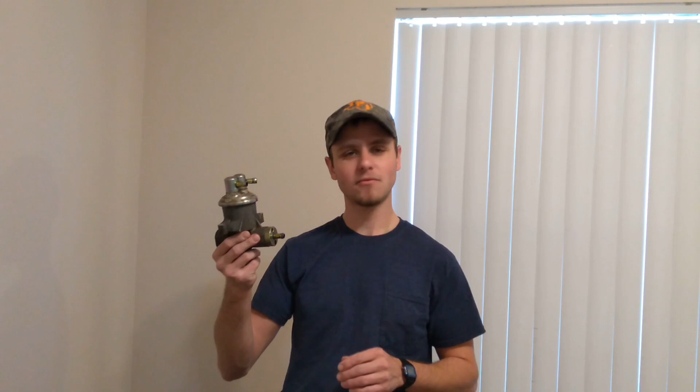Today we're going to examine the fuel pump from an old body style 7.3 Powerstroke, and we're going to figure out at what point you need to upgrade this thing in the event that you're shooting for larger injectors for higher performance. Now this applies for Ford F-250s and 350s in particular from years 1994 to 1997.

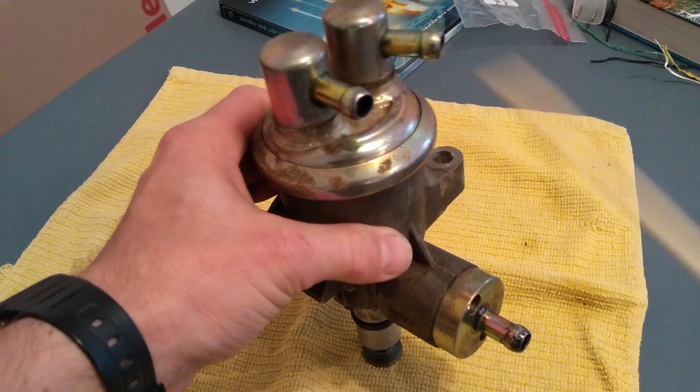Stay tuned. Now these fuel pumps feature a two-stage design. You have a low pressure stage and a relatively high pressure stage. Now the way these work is that you have a low pressure diaphragm operated stage that actually sucks and pulls in fuel from the fuel tank.

Now then, from the low pressure stage, that fuel is discharged into the fuel bowl where the filter is housed, and then from there, the fuel goes through the filter housing to the entrance to the high pressure stage, where it then exits out back at a relatively higher pressure, about 45 to 60 psi, where it goes through the banjo bolt and ultimately out to the fuel rails.

Now, in examining this pump, assuming that the pump itself is a limiting factor in the flow rate, then we're going to examine the two possible restrictions on this pump. Now, the first one is the diaphragm stage, and the second one is the higher pressure piston operated stage.

Now, the thinking here is that if we can't keep up with the flow rate of our injectors with the diaphragm stage, then we know that's the limiting factor. However, if this supplies more fuel than our piston operated stage, then we would know that our piston operated stage is then going to be the limiting factor in the flow rate of fuel to our injectors.

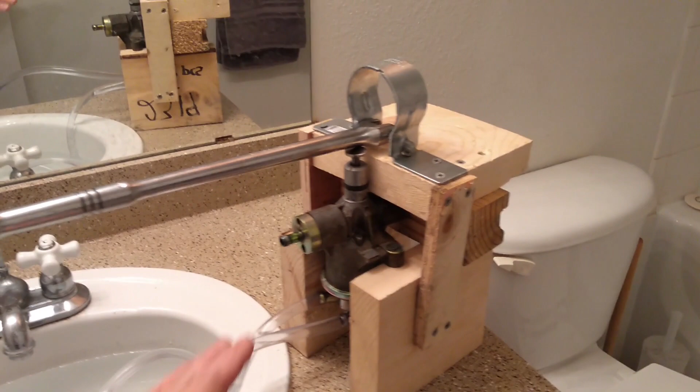Now, in order to determine what the flow rate coming out of the diaphragm stage of the pump is, I've built this kind of a goofy contraption that you see here. You can knock it all you want in the comment box, but it works. So, yeah.

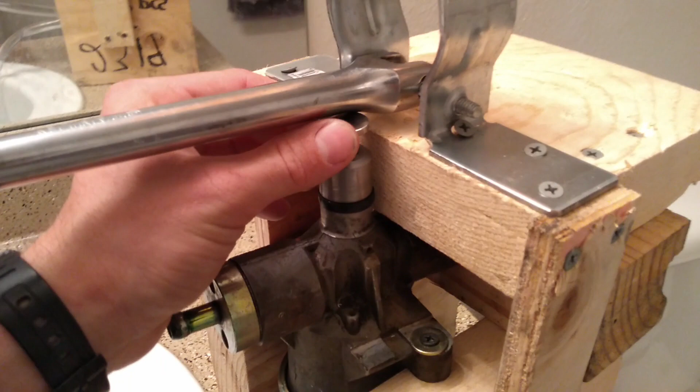Now, one of the things I found out as I was looking at the pump is that the tappet here that rests on the camshaft takes a tremendous amount of force in order to push it down and actually actuate the pump. So as a result, I've had to build this little lever mechanism so that I could help actuate a little bit better because I'm not as strong as a camshaft in a 7.3 is, unfortunately.

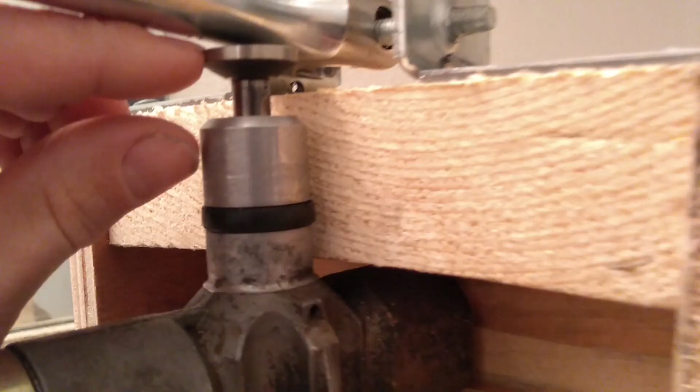Now the thinking here with this setup is that the water here is going to mimic the diesel fuel as it would normally be inside of your fuel system. Now using this setup, I can actually measure how much water or fuel is going to be pumped per every revolution that the engine turns over. And so we can determine what the volumetric flow rate is coming out of the diaphragm stage of the pump, and determine whether that's a limiting factor in our fuel supply or not.

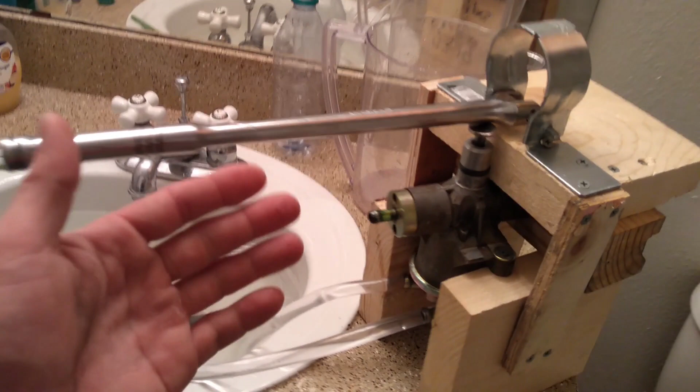Now, the thinking here is that by doing this over the course of 100 cycles, we should have a lot of very consistent pumps, and that should allow us to get rid of or minimize the amount of error that we have from initially starting up and putting the water into the tank versus taking the tube out and having some of that water maybe drip back into the tank as well.

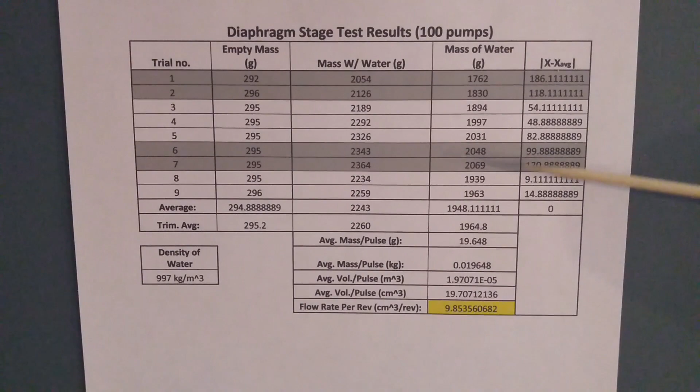Now, as a result of the diaphragm stage testing, this is the data that I collected. Now, the thing to bear in mind here, though, is that this pump is driven off of the camshaft. Now, the camshaft is actually connected to the crankshaft by way of a 1:2 gear ratio. So in other words, the camshaft rotates half of a revolution for every one crankshaft rotation.

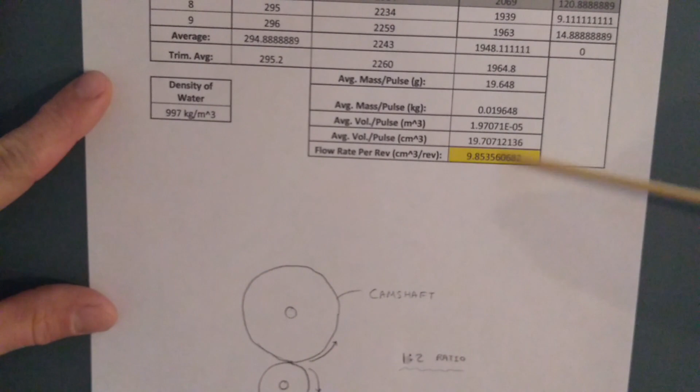Now, this is what's necessary in order for engines to operate, and what this implies is that our fuel pump is only actuated every 2 cycles of the engine, and that kind of limits us as well. So as a result, what I ended up doing was dividing the number of pulses that we had by the gear ratio, and that allowed me to translate the volume per pulse in the pump into a volume that it pumps per every revolution. And we see we get about 9.85 cubic centimeters per revolution.

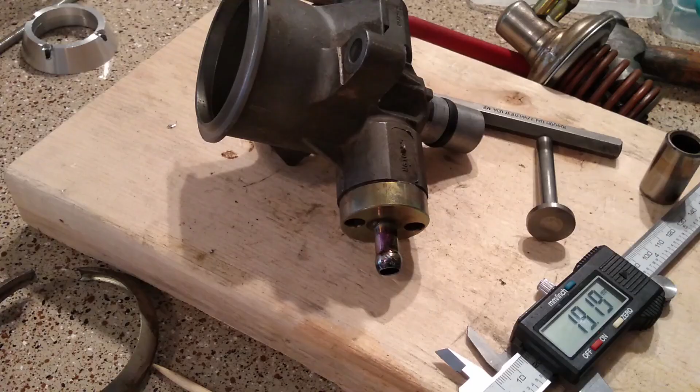Now this is great and all, but it really only matters if we compare it to the piston operated stage. So let's take a look at that next. Now, in order to determine the amount of fuel that is pumped for every pulse of the piston stage, again, I had to go about this in a little bit of an indirect manner. Now, the way I determined the amount of volume pumped was by actually measuring the dimensions for the piston inside of the fuel pump itself.

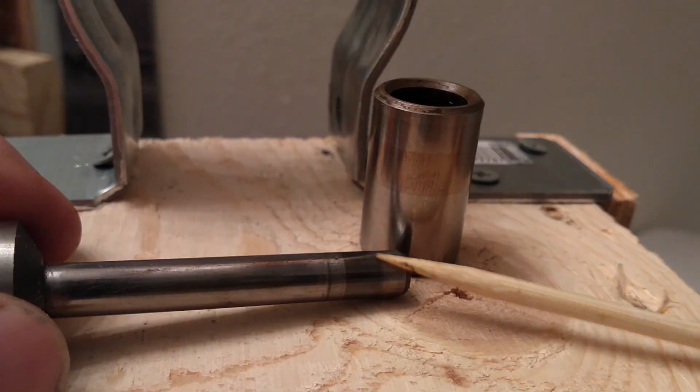Now, one thing to note here is that the way that I measured the stroke of this piston here is actually by looking at and examining the discoloration on these metal parts as they came in contact with rubber seals. They kind of had a little bit of a brownish color, and I came to reason that that was a result of it rubbing against that rubber, and with all the heat cycles, it caused that discoloration to occur.

Now, in the end, I was able to determine that for every time that this pump is actuated, this piston stage is able to move about 1.4153 cubic centimeters per every pulse that it's actuated. Now, in order to move that over to a volumetric flow rate per revolution of the engine, we got to again bear in mind that this pump is connected to the camshaft, so we have to divide that number by 2 because the camshaft spins at only half the speed as the crankshaft.

So as a result, we're able to convert this all over to 0.70765 cubic centimeters per revolution. Now, this is way smaller than the diaphragm stage, which, if you recall, was about 9.85 cubic centimeters per revolution. So we can clearly see here that the piston stage is indeed the limiting factor in our pump.

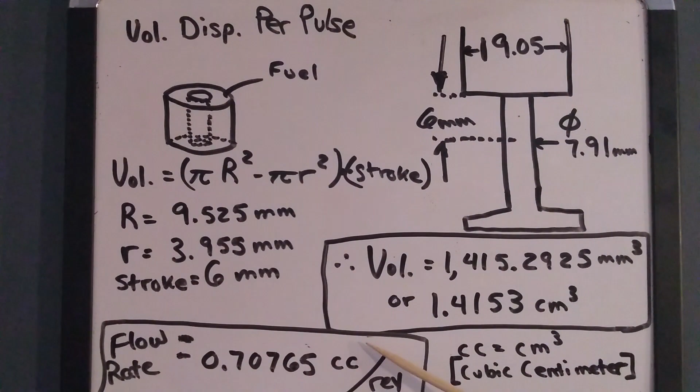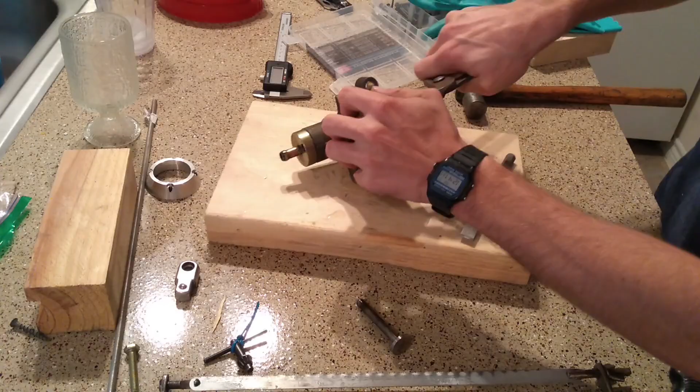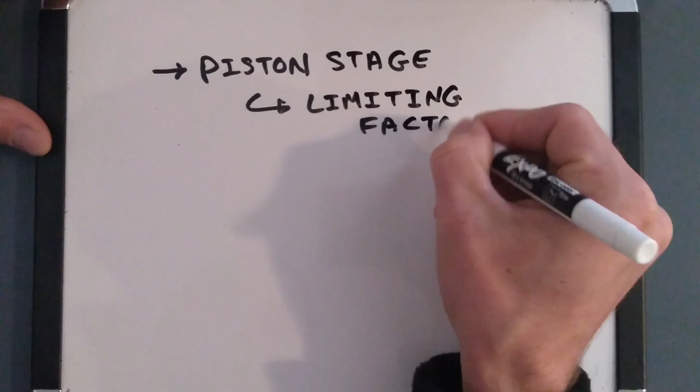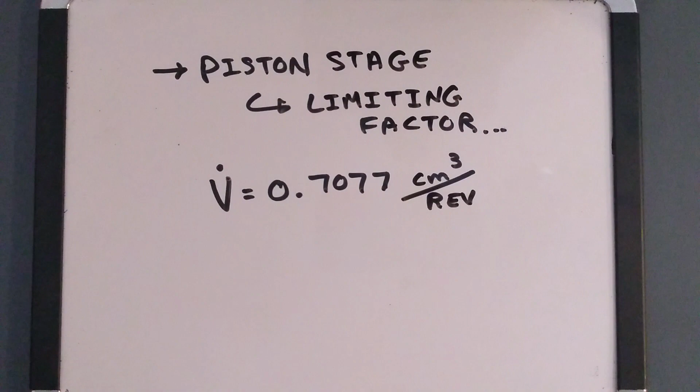So at this point, we've established that the piston stage of the fuel pump is a limiting factor in our fuel supply. And we've calculated that it can supply 0.7077 cubic centimeters for every revolution that the engine spins over. Now, in order to truly answer the question as to how adequate our fuel pump is, we need to figure out how much fuel do our injectors require to begin with.

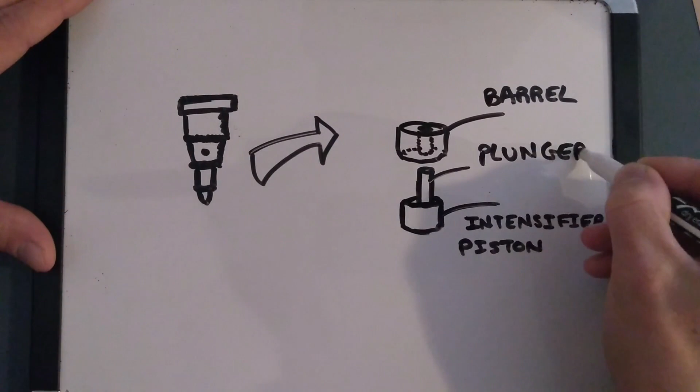Now, if we take a look at the inside of a fuel injector, we'll notice a few interesting parts. Specifically, let's take a look at the plunger and barrel and intensifier piston. Now, these are the parts that are most commonly modified to make higher performance injectors, but this has a big implication on the amount of fuel that's demanded by the injectors. Let's take a closer look.

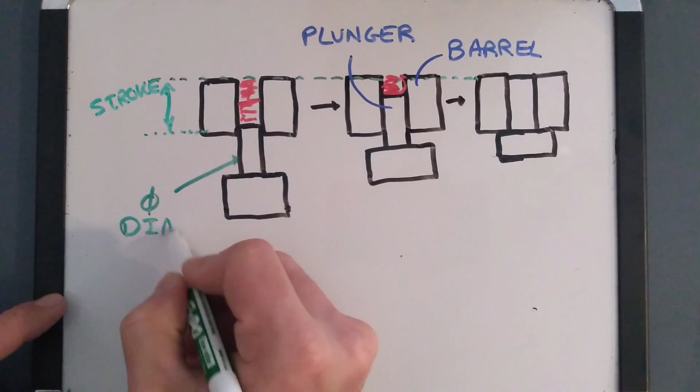Now, inside the fuel injector is the plunger and barrel assembly. These are the components that actually do the work of putting tremendous force on the diesel fuel to inject it to extremely high pressures into the combustion chamber. You can kind of think about the injector as being almost like a miniature engine with only one piston in it. But just like your engine, we need to fill it with some sort of fluid, in this case, diesel fuel. So you can visualize that there's this cylinder of diesel fuel that's present inside every single injector.

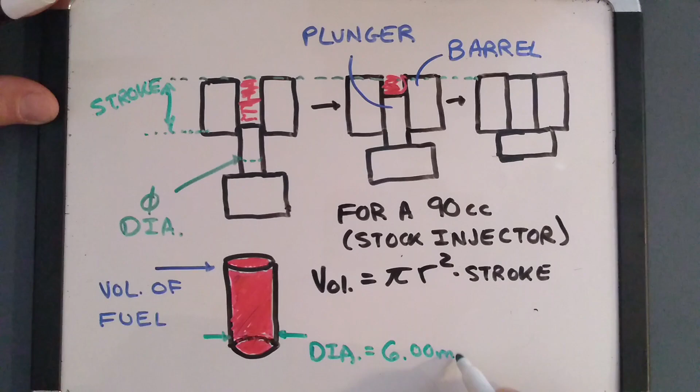We effectively need to make sure that we can fill this up in the event that we're maxing out the injector flow rate and we're dumping all the fuel out of it as we can. Now, for a stock 90cc injector, at least stock for old body style trucks, non-California models, we can figure what this volume is. Now, you run the numbers and this turns out to be about 0.09088 cubic centimeters. Now, this is certainly a very small number, but let's work with this a little bit further.

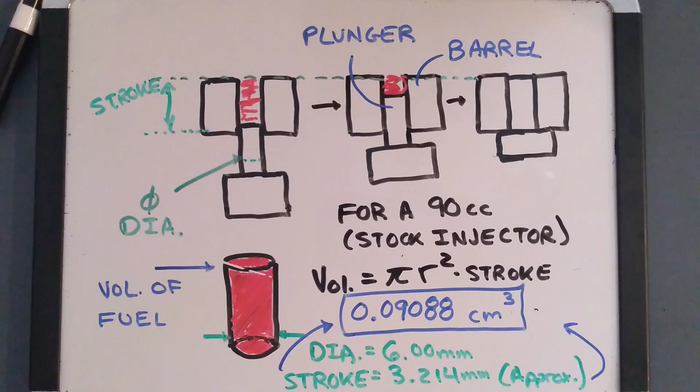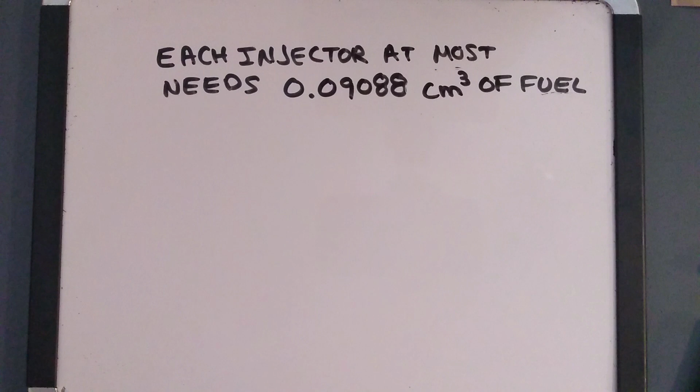Now, if we figure that each injector, whenever it fires, completely empties out all of its fuel reservoir, then we can figure about how much fuel is necessary to supply all 8 injectors for every combustion cycle. Now, this is reasonable because the stock injector nozzles actually flow more than the injector capacity is. So it is feasible with nothing more than an aggressive tune, we can completely empty out the injectors. Now, if we consider that every 2 revolutions or 720 degrees, all 8 of our injectors will fire, of course, assuming your engine is firing on all 8 cylinders.

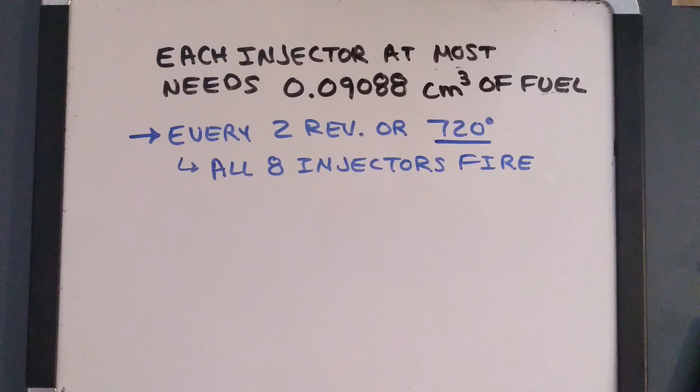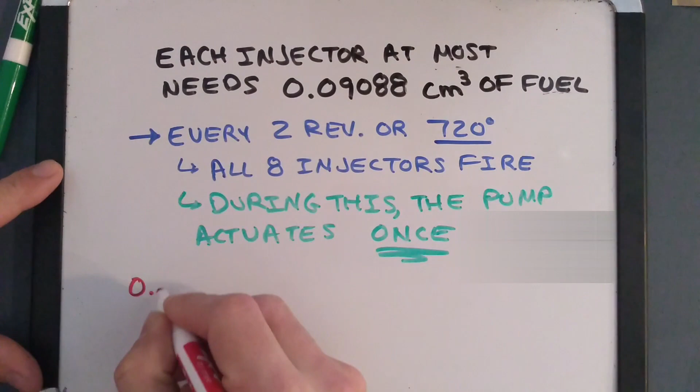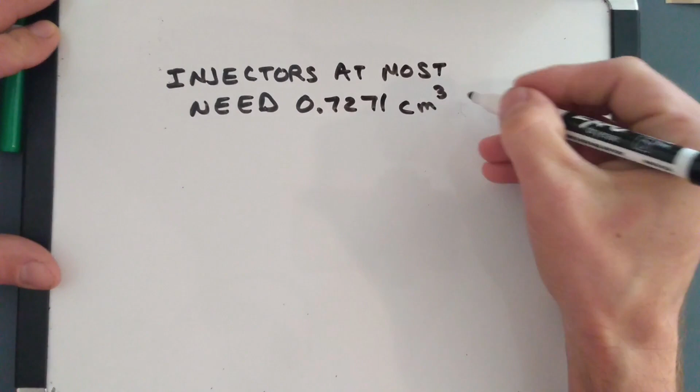Now, we know that for every 2 revolutions that the engine spins over, our piston stage of the pump only pumps once. Now, since we know the volume that's required to fill each fuel injector, we can then multiply that by all 8 injectors and figure that over the course of 2 revolutions, or for every 1 pump piston stroke, then we require 0.7271 cubic centimeters of diesel fuel. So at this point, we figured that the injectors need 0.7271 cubic centimeters of fuel for every 2 engine revolutions.

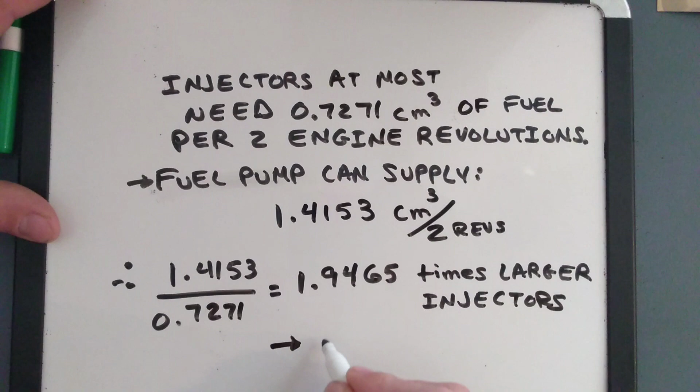Now, as we found before, our fuel pump can supply up to 1.4153 cubic centimeters per every 2 revolutions. Now, this translates to basically twice the amount of fuel as is required by the injectors. Now, this is good news as it means that we can indeed run bigger injectors without upgrading the fuel system. Now, you do a little bit of math here, and that translates to about a 175cc injector. So that means that probably about a 160cc capacity injector is about the limit before you really need to start looking at fuel system upgrades. And there we go, we have our answer.

Now, bear in mind, that limit of about a 160cc injector is really all just theory. In fact, all we've done here is really just find the fundamental limit as to what that fuel pump can actually supply. So in a real-life scenario, your actual limit is likely going to be slightly less than what we've calculated theoretically due to other inefficiencies that we're not accounting for.

Now, folks, bear in mind that this video isn't necessarily the end-all, be-all. In fact, today all we did was look at the mechanical fuel pump on a 7.3 Powerstroke specifically. Now, this was all theory, and there's, in fact, a lot of aspects to this fuel system that we didn't even take into account today. Now, at the very least, I think this does go to show that the mechanical fuel pump does have its limitations, and there's a certain point at which, if you're going for high performance, you're going to need to upgrade that fuel system.